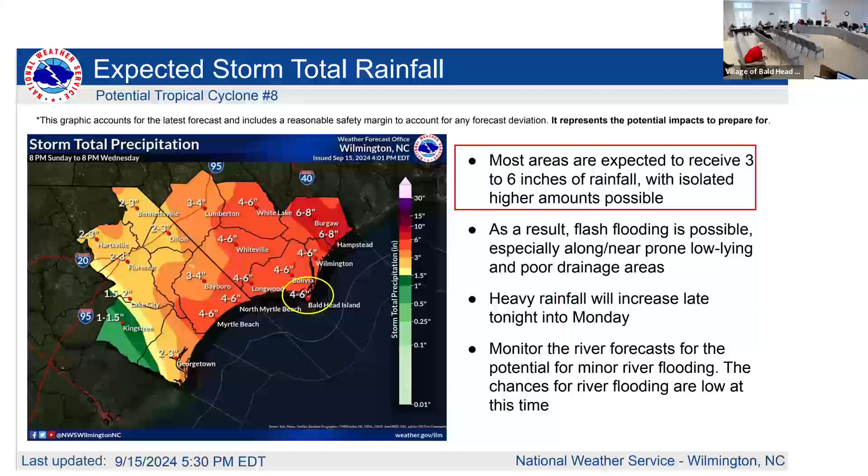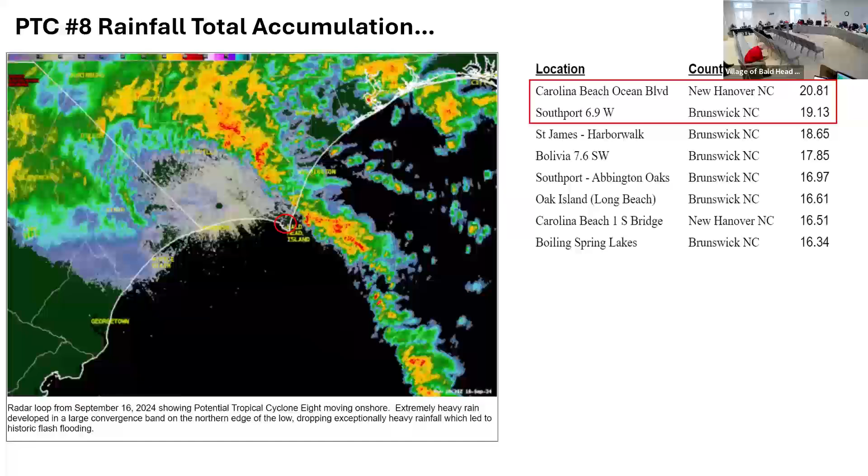And so then, as we know, Bald Head Island here, that orange came up on us from Southport, Bald Head, and up to Carolina Beach and Southport, where we got 20-some inches of rain. And so the big impact to the island obviously was the flooding. Hardest hit areas were predominantly in areas of elevation between 5 and 7 feet of mean sea level, and I'll show you some examples of that.

We had some challenges with our personnel, due to those flooding impacts and impacts on the mainland and the limited or the elimination of the ferry, so we had to find alternative methods of transport. And we were able to get over by Sea Tow and TugBoat USA from that Monday, the 16th, on through to the 23rd until the ferry resumed normal service. The other big issue was the wastewater treatment plant reaching a critical point of almost failure due to the infiltration and inflow.

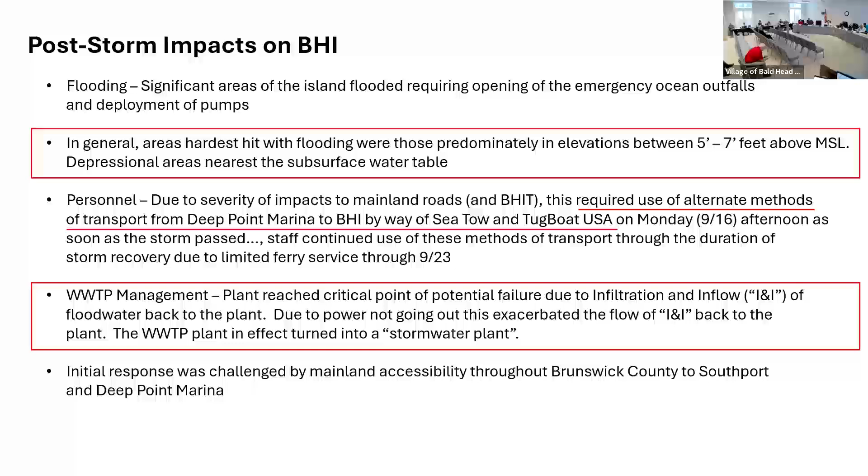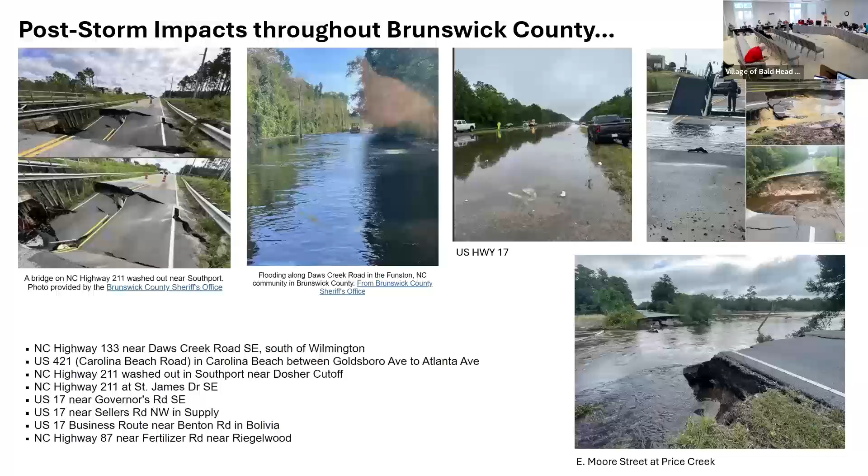Just to acknowledge those impacts on the mainland side with the roads that had gotten washed out on 211. This was 133, 17. This still is a problem, East Moore Street, and not exactly sure when that's going to get repaired. But that was an issue for folks trying to get to the island.

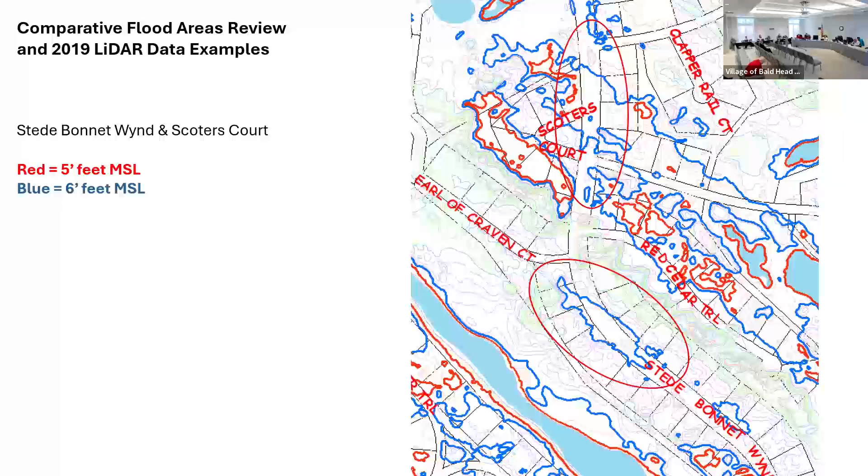Chris, can we attach any other pumps to that 10-inch pipe? No. Okay. Are we able to get permission to add in more pumps and more outfalls? So that's still going to be a big part of the phase two stormwater planning project to evaluate. Because that was a big criticism, that the village should have gotten the water off much faster. And so, 20 inches is... and let me say, I don't want to say criticism, observation. The observation that we should have gotten the water off much faster.

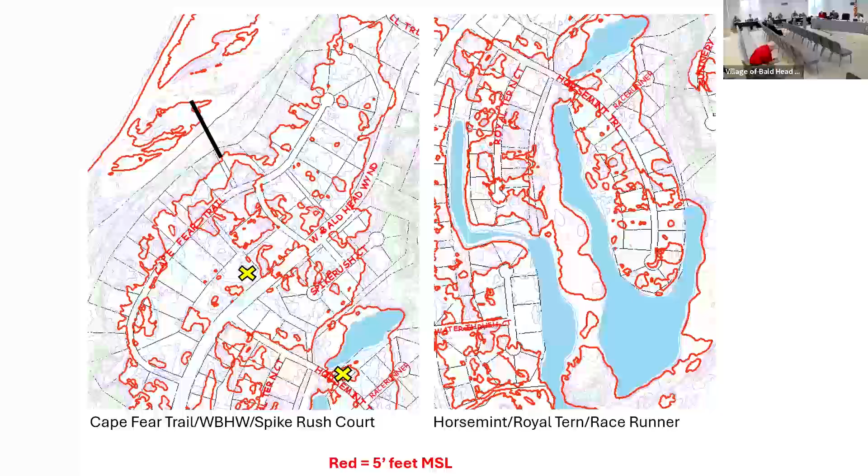And so is that a possibility, bringing in larger pumps and making new connections to the lagoon system and making new connections to the emergency ocean outfalls, because we have two sets on West Beach and two sets on South Beach. And we've talked about South Beach in particular, opportunities for tapping into the 17th lagoon with another big pump and hard piping out through the other set of outfalls.

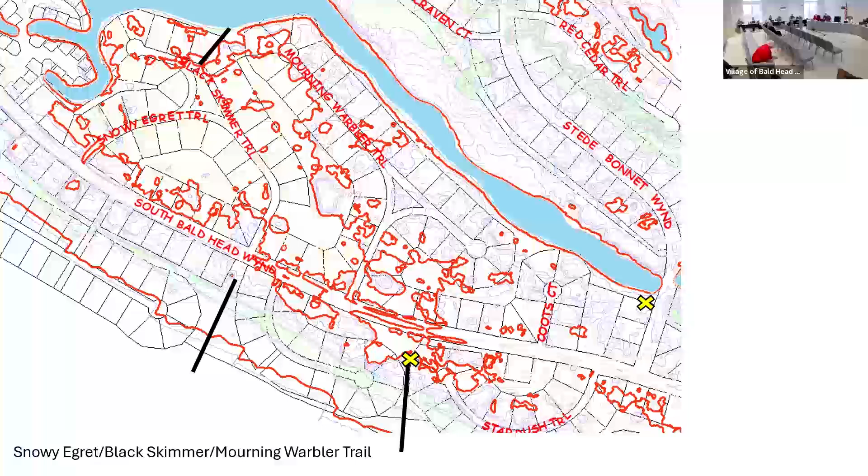So here is the Black Skimmer, Mourning Warbler area that was flooded out. And here's our 10-inch pump on Stede Bonnet at the 17th lagoon that's hard piped out to this emergency ocean outfall here. This is the other set that I was referring to, that there may be some opportunity to put something in up here with a pad and another 10-inch pump maybe, and hard piping through the common area out to this intake box here.

Back up just. So I noticed, between the hard pipe coming out of Snowy Egret and the hard pipe that feeds from 17, there's on the south side of South Bald Head a red area, a low-lying area. So the outfall on the left is gravity fed, right? Yeah, there is no hard pipe connection to that. There's a culvert, and if there's enough flood water that gets high enough, then we can use that one. The problem is it may not have been high enough for that to be effective.

Right. Move that over to where there's a lower lying area where the intake would be more effective. Should that be a consideration? Yeah. So right now we have a culvert crossing. If the water is not higher than the road and floods this out, then by gravity, we can't use it. From Florence, it was so deep that we did. With PTC 8, half the amount of rainfall, that wasn't the case.

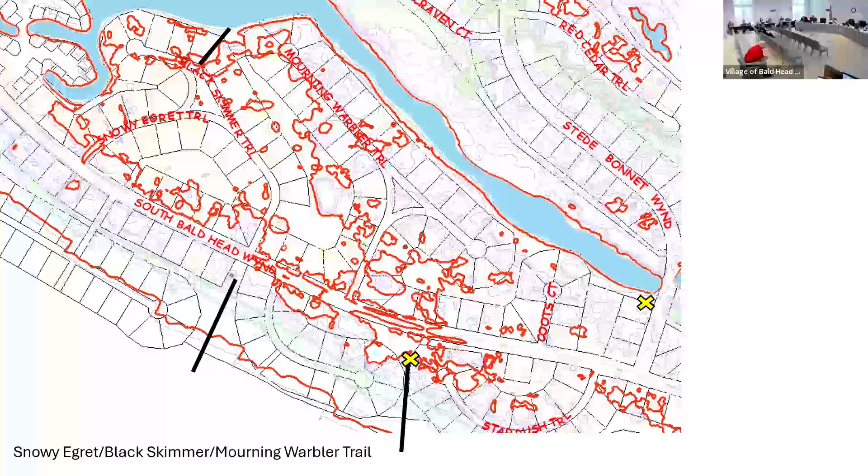So the east end of South Beach, we know, has been prone to flooding, and again, it's those low-lying areas on the south side of South Bald Head Wind through portions of Killegray Ridge, Flores Bluff, through Ballantrae, Seaton, Dunedin, and Inverness. All these areas here, we saw floodwater, and a lot of that is driven, I think, by hydrology. From a hydraulic point, there's this high dune ridge. You don't see it. It's not surface runoff. It's underneath, but it's all pushing down to these low-lying areas.

Got it. So even as you pump, those areas are just going to refill. And so we just have to continue to pump, and then we get to a point where we pumped it down with those 4-inch diesel pumps, and they start sucking air. And so we shut them off for a period of time until it comes back up, and then we cycle it back on. And so there were times when folks would ride by and then call and question, well, the pumps aren't running. Well, that was part of the reason.

So this really was pronounced in Florence, and out of Florence, with our engineers at the time, we had discussed options for outlets in this area, which we had said, cost benefit wise, to put in additional emergency ocean outfalls. If we needed to, we could just cut through the dune. I don't know, that's still a question. Either way, the water's gonna be there. Do we cut through the dune and let it flow out by gravity versus pumping?

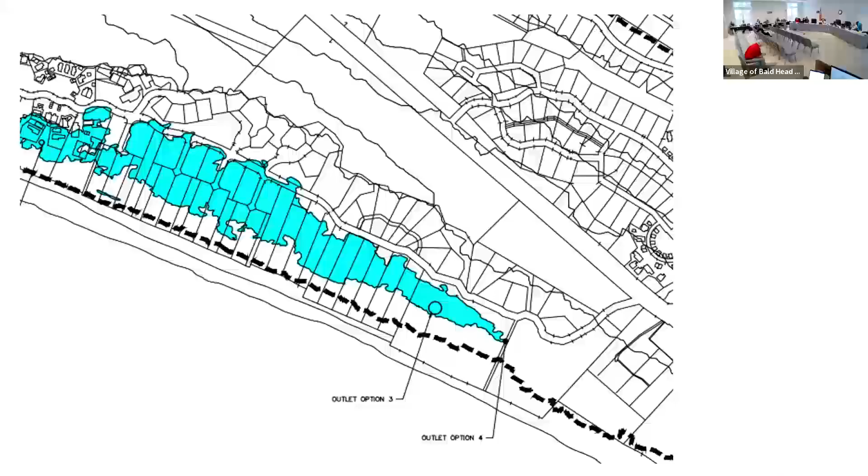Did the homes along there have grinder pump issues? The homes in this area, Seaton, yes, we did pump them. We had two 4-inch pumps at one time. We were going back and forth through here. It seemed to work from Inverness back to Seaton, these 6 foot or 5 foot areas.

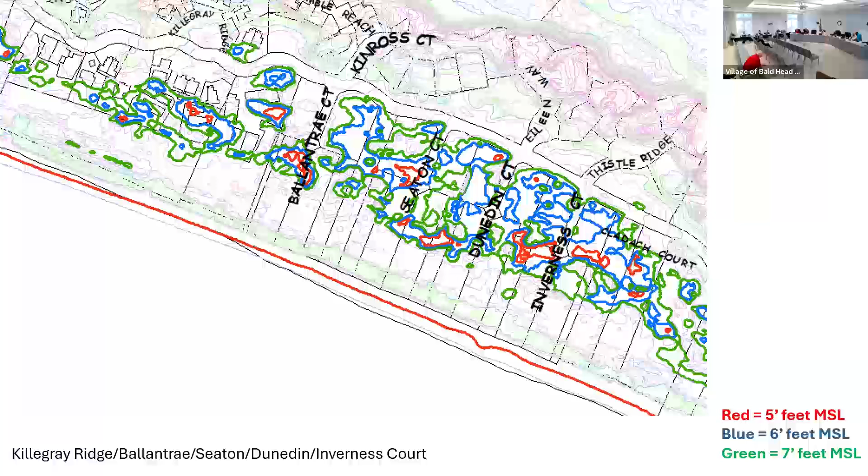At the very east end, along Station House Way, you can see these areas here where the groundwater table would rise up and flood those areas. It was collecting with the heavy rain, the circle at the Shoals Club entrance. And it took a long time for that to drain out.

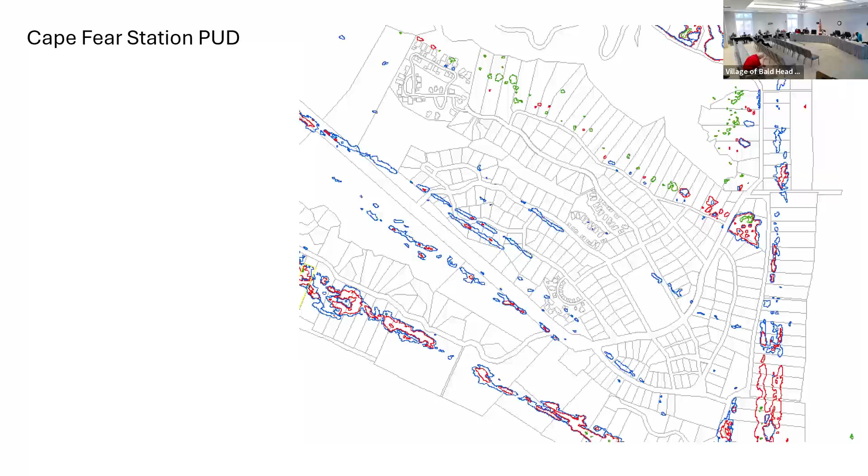I just want to show the Cape Fear Station PUD area because this gives you an example of why you don't see many issues down there. Because everything is above that 7 foot. There's the area of Federal Road that we were dealing with, of course. But predominantly Cape Fear Station is not a problem.

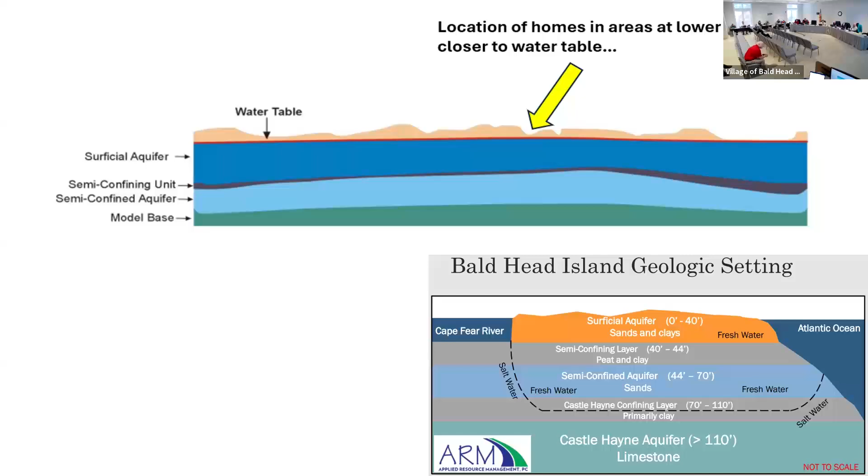Chris, may I add something? Yeah. The other point I'd just like to make too is, you'll recall, people had commented towards the end about how low the lagoons were and that we kept pumping. Well, we had to affect those 5 to 6 foot mean sea level areas. We had to keep pumping, even though it's high there, because, as Chris is saying, the groundwater moves around so much. So if you drain it in one area, it finds itself in another area. To get those 5 and 6 foot elevations, we had to keep pumping it.

And to do that was to slow down the flow to the wastewater plant, because we still had grinder pumps that were in those areas. And that was my concern about flow to the plant. We had to keep pumping; even though people were seeing gains at the lagoons, we weren't gaining enough on the plant to stop yet. So that's why we kept doing it.

To your point, I got back to the island on the Sunday after and drove by the bypass lagoon and it looked empty. Drove by the lagoon on 8 and it looked empty. I'm like, oh my gosh, we ran the pumps too long. 2 days later, they were almost back to a foot or two down from full pond. I'm like, whoa. So fascinating how that happens. Yeah, we gotta be careful. I was nervous. I'd never seen that quite extreme in our pumping actions and the reaction of the water table so drastic.

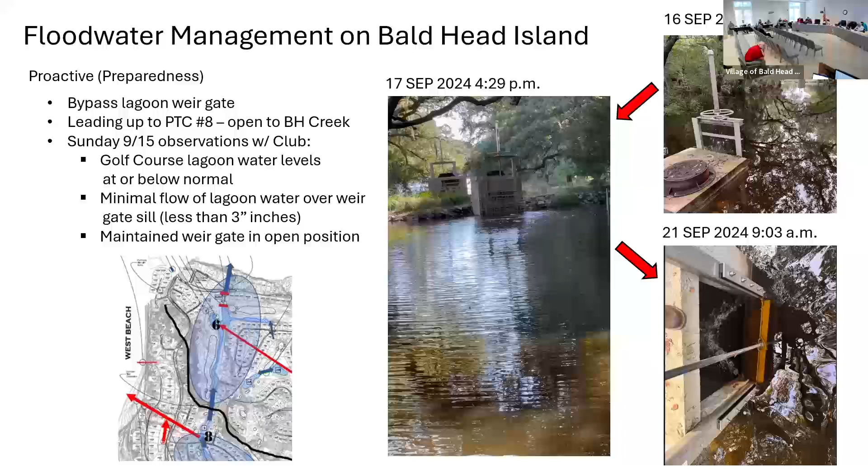And by the 21st, that water is moving from the club side lagoon system out to the creek. So from the 16th to the 21st, if you look at these bolts as a measure to gauge how much water we lowered the lagoons in that period of time. That's in response to the amount of rain. Remember, preparedness, proactive, we didn't have any water on the island. Right. Once we got the water, this is reaction. This is responding to that, in addition to other areas with force main pumping.

And just to acknowledge here, when people ask why can't you pump before the storm? Well, we have to show the state that there's a clear risk to public health and safety. And we don't have that, obviously, before the event. But when it happens, then we respond and we recover. Our focus of initial response is to remove the flood water off the island to reduce the subsurface water table to allow standing surface water to infiltrate into the ground.

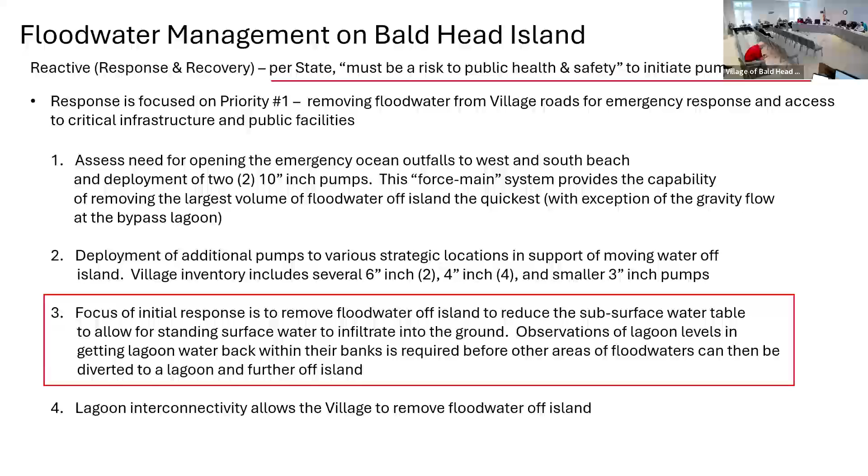And then we continuously observe the lagoon levels, our coordination with the club, and through the lagoon interconnectivity of the island, which this map shows here, where the golf course irrigation distribution system is here and the irrigation lagoon, and where they can move water from here in a variety of directions.

But what we do with the club is we're either moving water off the island to the bypass lagoon, or we're moving water off the island to South Beach, or we're moving water off the island to West Beach and the Cape Fear River. And all that done with those 10-inch pumps, which maximizes our effectiveness and our efficiency to draw that water table down as fast as we can. It benefits the whole island.

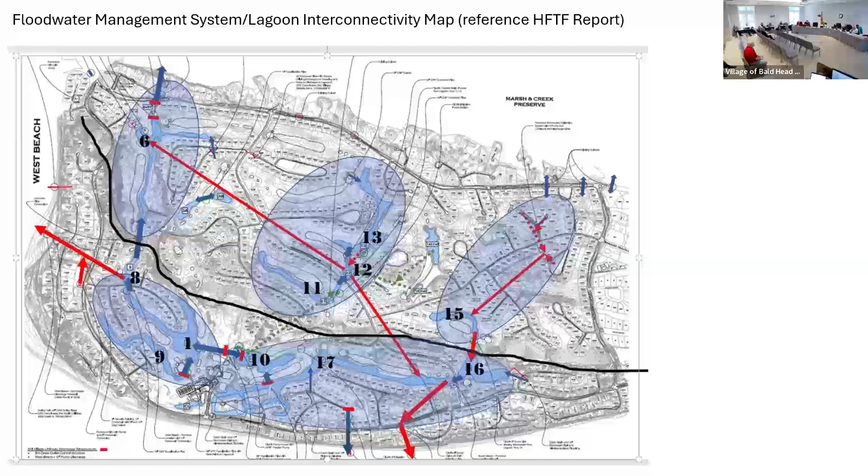Chris, I don't know if there's some potential, when the club does the renovation of the golf course, whether there's potential to work out some other measures to help the island. Yeah, stay in touch with Adam. Yes, and I have a few points in here, when we met with Adam and went through this, but one thing I wanted to show with this visual is just to acknowledge when

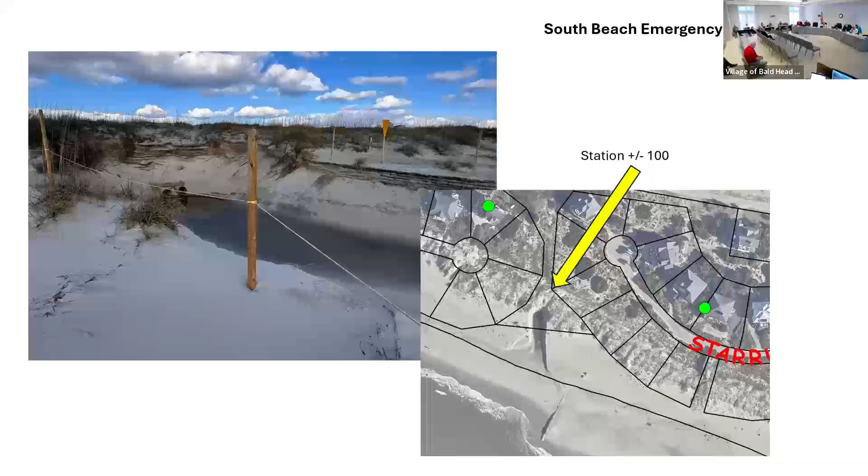folks say, well, can't we just open up the ocean outfalls and start pumping? Well, this is the after effect of what happens when we open the outfall. Notice the outfall and how low it is below the peak of the frontal dune here. That's probably about 18 feet up. You can see it in this aerial imagery here where it was flowing out.

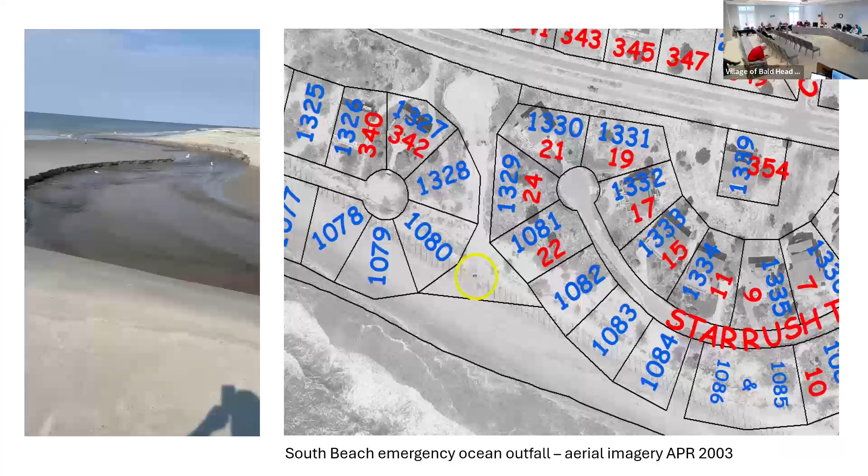And just to show, this was what the oceanfront shoreline looked like in 2003 when these were installed. That's where they're at there. But I thought this would be a good visual to show. So water's only coming out that one side because we only have a hard pipe connection to that one pipe. And then did we bring tractors in to smooth that out after the fact?

So we're working with the dredging contractor who coincidentally will be here and they'll be pushing sand in to fill that back in. And we have had discussion about going to the state. Remember, we got a variance from the Division of Coastal Management, the Coastal Resources Commission to put these in 2001. You can't just go out there and put this stuff in. It's not permittable. So we had to get a variance and they approved it.

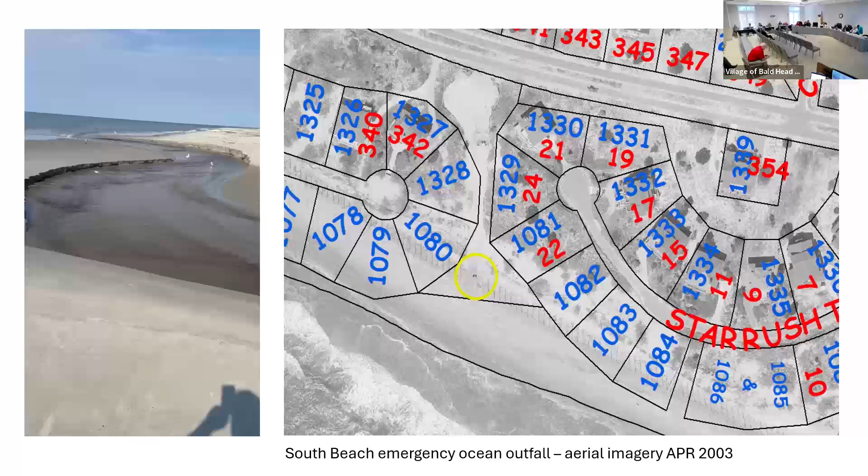But what we will look to do is see if we can get a variance to extend that pipe further seaward. We're still gonna have to dig down below grade because it'll be about 7, 8 feet below the shoreline grade, but it's not under that dune. Right. So it doesn't keep disturbing that dune. Right.

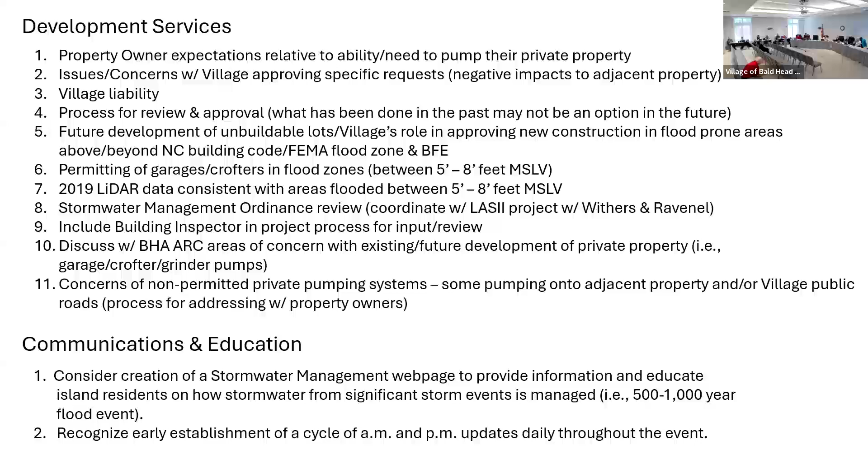But I'd be careful about that 500 to 1,000 year event. I know that's terminology that's used, but around here it's about a 4 or 5 year event. Right. Yeah.

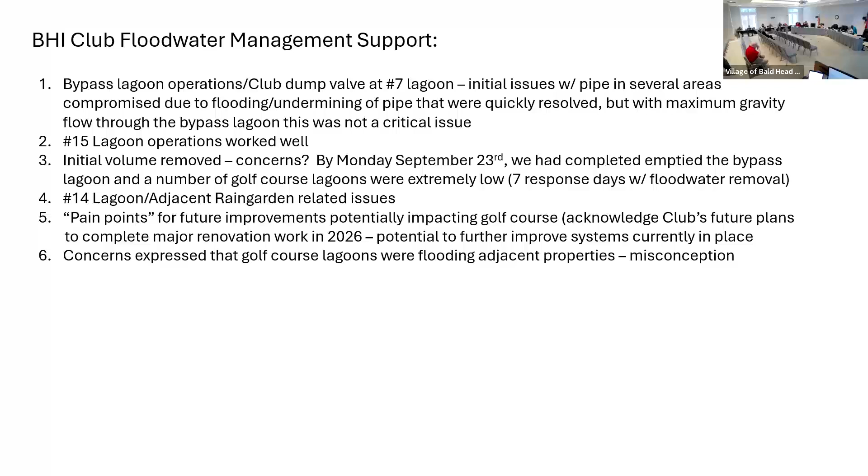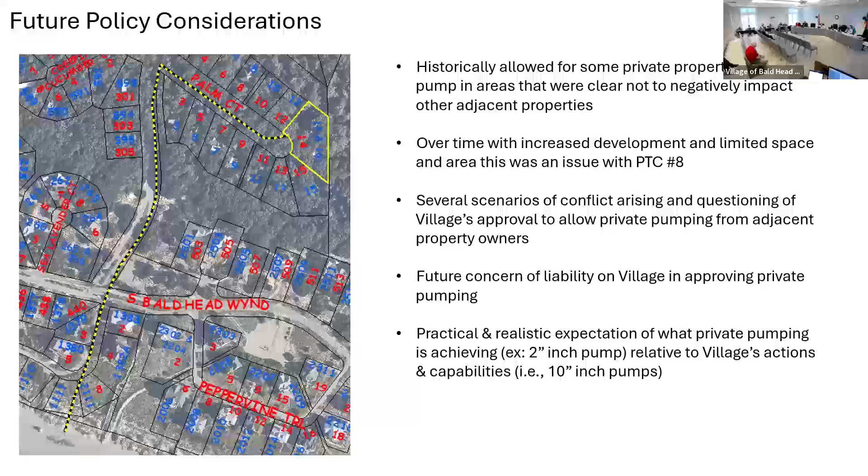So just taking all that into consideration, I figure maybe during the retreat, if we want to have more conversation on that. I had some people question about the pumps that were donated as a result of the Florence fundraising. Yes. And I think it'd probably be good to get information out there about where those pumps were located and how well they worked. Those pumps worked really well.

We actually ordered another one. We bought 2 and some ancillary equipment. We had some funds remaining, and the deal was that it be used to pay for tangibles to support pumping. And we had a little left over, and we budgeted for an additional pump, and we used the remainder of those funds for that pump. So we used them all over.

For reference, whenever in past events we were talking about the 4-inch diesel pumps, those are the 2 pumps that were purchased with that money. So we mentioned it a lot in the notes. Okay, I think something public would be useful.

Yeah, and when you come to your final presentation, list the inventory we had pre-contributions, and then a separate column, and then contributions led to these additions. So therefore we had a total of these number of pumps by size. And so it's very clear and visual. People can see the value or the benefit from the contributions they made.

Yeah. So that's pre-Florence. We got those after Florence. Right, but we're saying he wants the list pre-Florence, before those pumps were bought. Yeah, so what pumps did we have during Florence? What sizes? That's one column. Next column is, because of the contributions we received, you added one here or 2 here, and so now we have a grand total list. Gotcha. All were used in PTC #8.

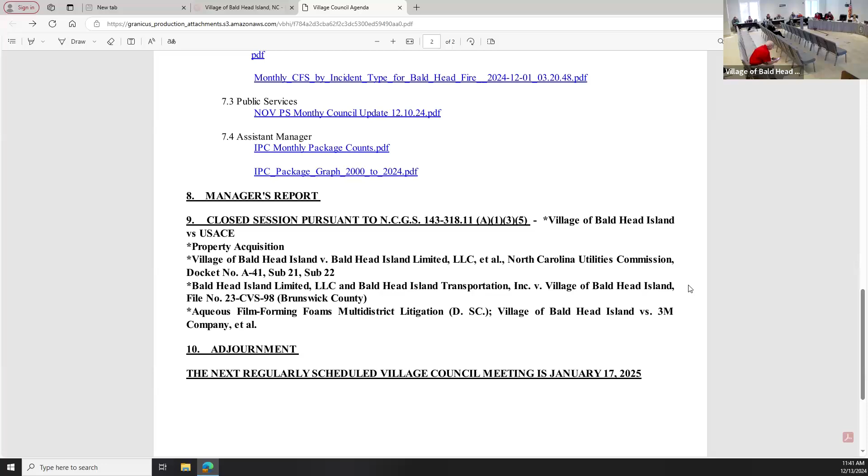Yes. Having that in there so people understand that we learn after every event, we make modifications, and we're going to continue to learn. We're never going to get this perfect. Right. Things are going to change, but we're going to get better, quicker, and more efficient. Yep.